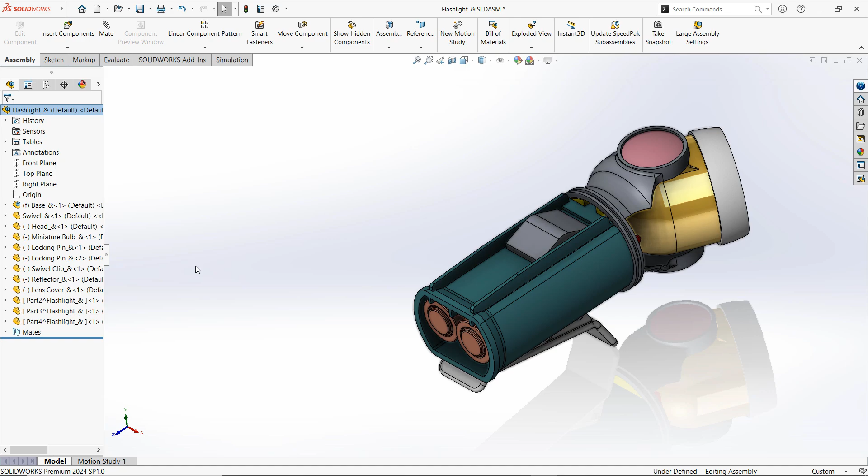Today is all about in-context assembly modeling. If that's not something that's familiar to you, you've clicked on the right video.

Let me tell you what we want to achieve here. We want to create a little cover that's going to go over the bottom of these batteries.

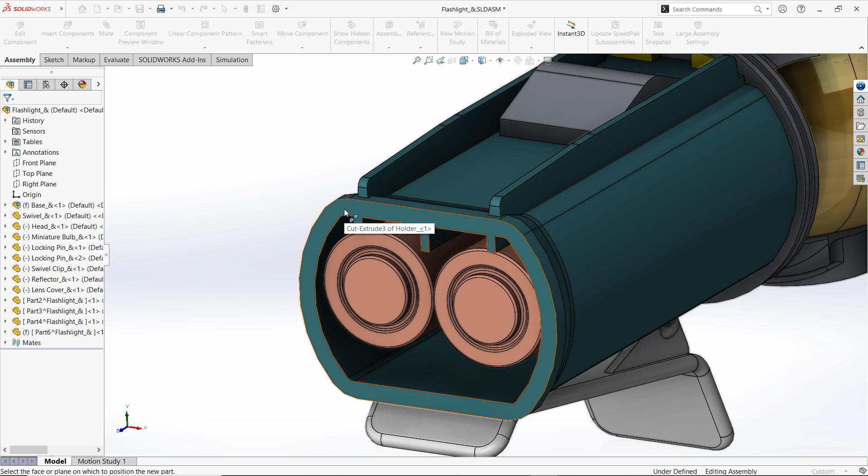Now, of course, I could just insert it if I already had it, but if I click on new part, it starts to put me into this world of in-context design. After clicking new part, I need to choose where I want this new part to be. Obviously for us, it's going to be on the foot of this model.

Now you'll notice it turns everything transparent. I can just see the outer lines, and that's it trying to help us. It's trying to give us references that we can use.

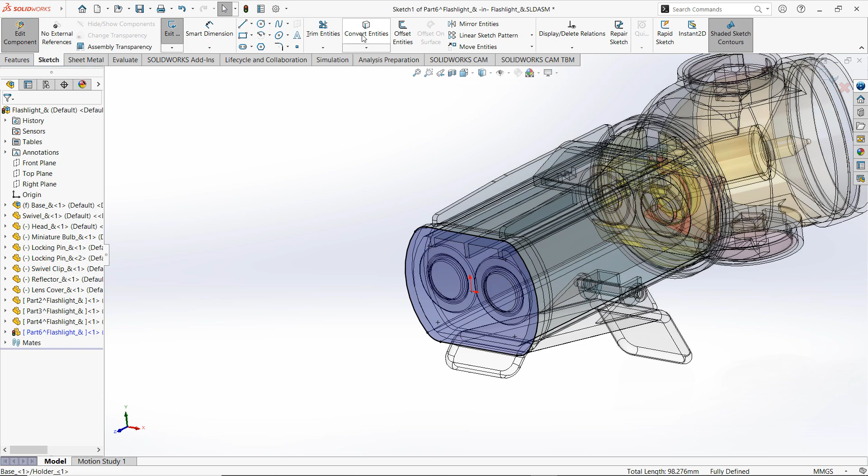So given that, I'm going to use my convert entities. I'll select the tangent loop of this bottom. Again, I could sketch it in, but why would you when we've got these tools like convert entities and select tangency? You can see it's bringing those outer edges through, and you'll also notice that although I'm in the assembly environment, I've got access to all my usual 3D modeling tools.

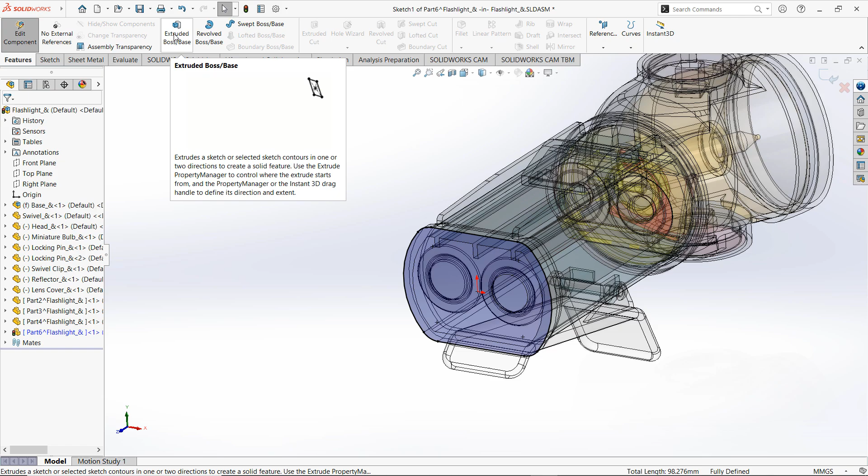So I can go in here and do a normal extrude. Now what this is allowing us to do is create the part in the context of the assembly, and there's a number of advantages to doing that, as we'll discover.

So let's make this 3.2 mil. I'll hit OK, and there we go. We've brought in the basic shape of this cover.

Now it's not exited us out of this component just yet, because there might be additional things we want to do, such as maybe add fillets to it. We'll go ahead and do that now.

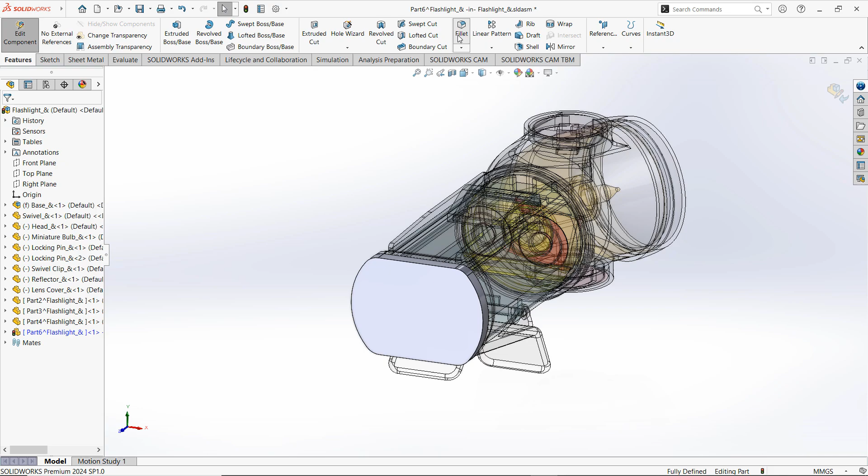And you can see I can actually create this part using references of the assembly which it belongs to. So rather than have to go off and start a new part, then drop it in later, I can do it right in the context of the assembly. So there we go, I've got my basic shape, that's looking pretty good.

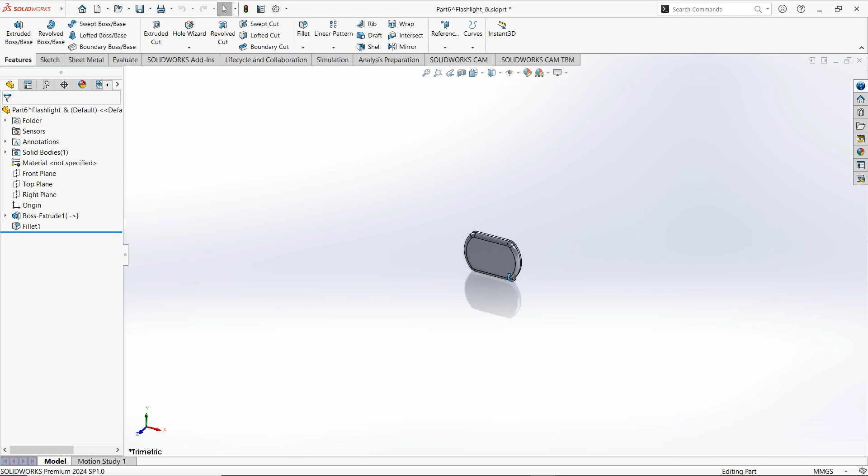And the way to think about this is it is a completely separate part. So if I click it, you can see it in the tree here, cross references, just like if we'd added it in and hadn't created it in context. And if I even open it up, you can see it stands alone, it's its own part.

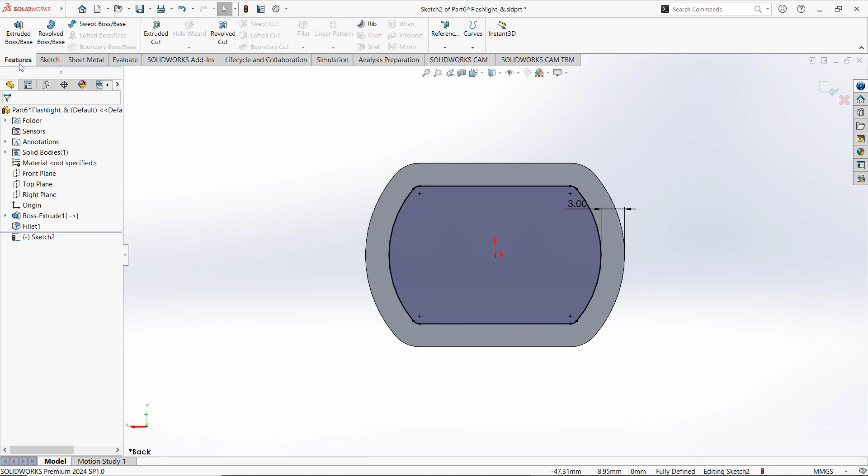Now what's really nice about this function as well is that it's got references back to the parts. So if I make a change in here in the context of the part, that's then going to be reflected in the assembly. So we'll go ahead and hollow this out. We want a 3 mil wall thickness, and we'll put a cut into this.

Not a through all cut. We'll go blind, and we're going to go 2.2 mil, leaving ourselves with that 1 millimeter wall thickness that the rest of the model has.

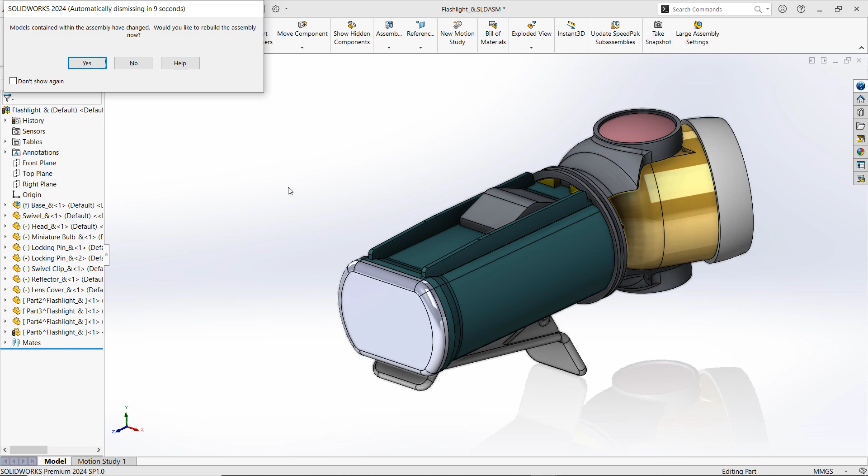And then I could then go ahead and save this, or I can just close it down. If we just close it down or switch back to the assembly, it'll ask us, a part's changed in here, do we want the assembly to reflect that? If I click yes, there we go, the part is brought in. And if I isolate it, what you're going to see is it's using that new version of the part.

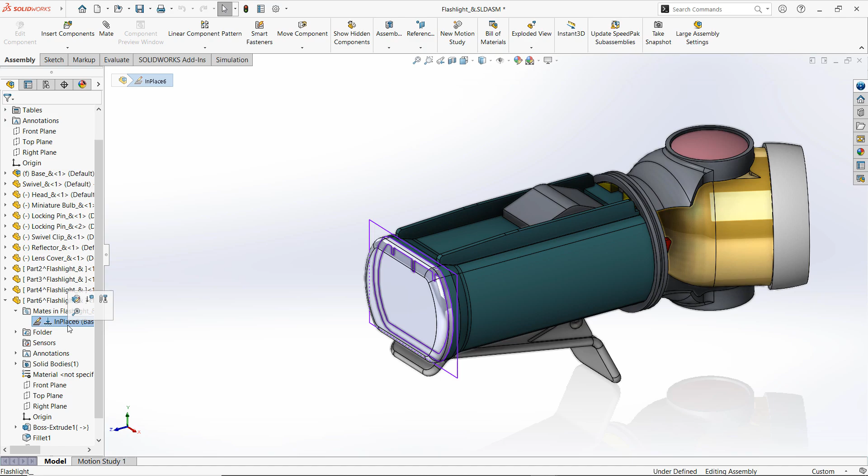Now SOLIDWORKS is pretty smart in the way that it goes about this. If I exit out of this isolate, one of the things that it's done is it's actually added a mate to this part. So even although we created it in the context, we certainly didn't add a mate, it's added an in place mate, which tells us it's in place, it cannot be moved, and it's using the references from that original assembly that we used to actually create the shape and create the model.

But sure enough, if I delete that mate out, I'm free to move this around, as you can see, just like any other part in an assembly.